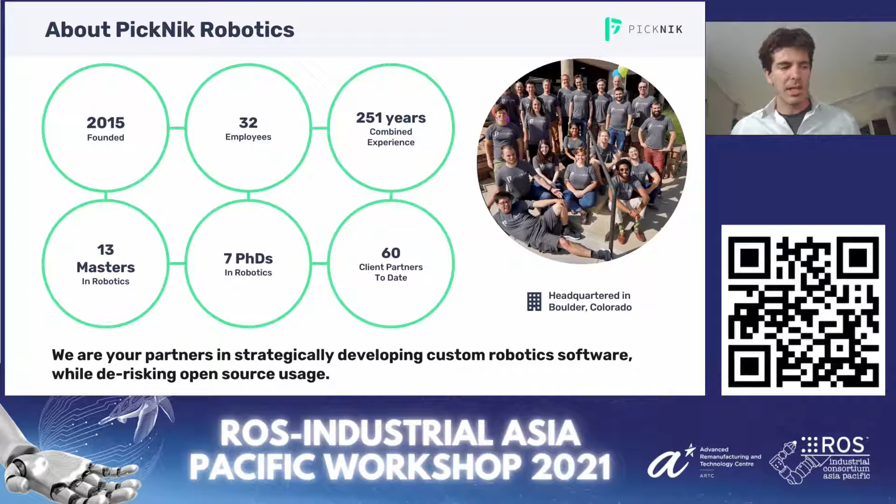And I would like to start out with I'm Dave Coleman, CEO of PickNik, and start with a big picture of where MoveIt's at. I guess before that, though, next slide, the agenda. Next slide. So PickNik Robotics, we're in Colorado in the United States, and we've been around for 6 years now. Team's growing quick, so just you see we have a very talented team of people who build custom robot software in the ROS ecosystem, and in particular MoveIt. Next slide, please.

And so our mission is to make this platform of software that can do all sorts of multi-purpose tasks. And we're really excited about what we've been able to accomplish so far. So the dream, of course, is this Rosie robot idea where it can do all these unstructured tasks. It can do industrial factory type tasks, of course, but also a lot of domestic tasks in your home, laundry, pancake making, dishwashing. So we're far off from this, but it has been done before in a very experimental approach at Willow Garage, and we hope to make that more mainstream in the future.

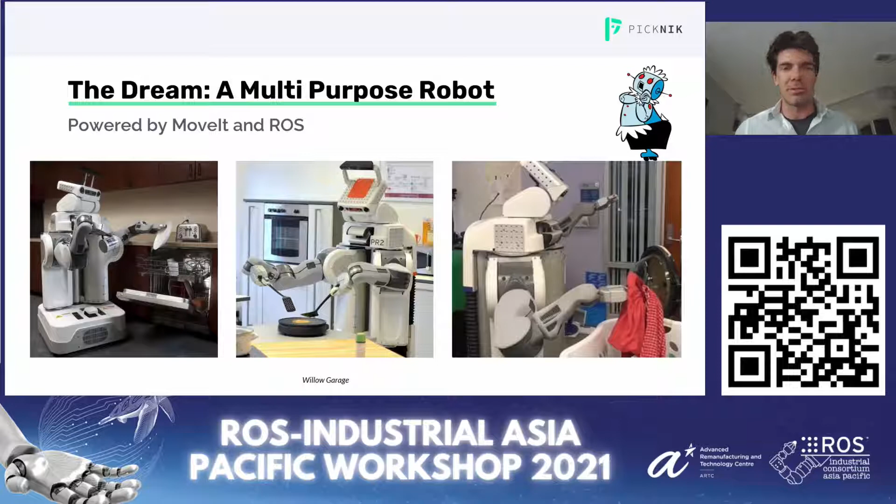Next slide. So MoveIt started in 2010 at Willow Garage, where same time ROS was developed. So it was developed as the manipulation package for the ROS ecosystem, and it's gone through a lot of iterations since then. Last year we announced MoveIt 2.0, which is simply MoveIt for ROS2, and whispers are on the street of what will MoveIt 3 be like, and what API changes, and what's the next big revolution in MoveIt 3.

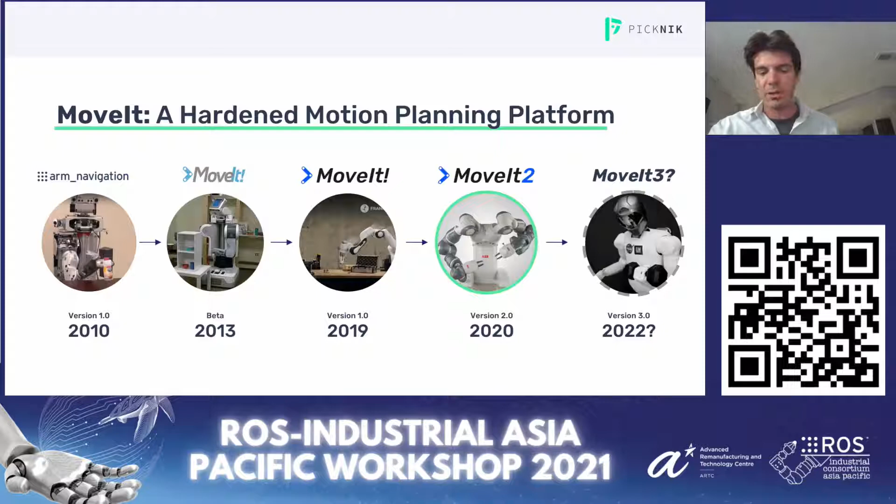And the difference between MoveIt 1 and MoveIt 2 is unlike what Matt Robinson was talking about with this at SwRI, their strategy of having the same library support ROS 1 and ROS 2, we took a different approach. Has lots of pluses and minuses. It's unclear which one's better, but we actually just did a straight port of everything in MoveIt 1 to MoveIt 2, and we're still syncing the two code repositories through Git, so code syncing, but they are in fact different versions. Next slide.

And the ecosystem of MoveIt keeps growing. There's a lot of different plugins to do different types of things. Some of them are more mainstream supported and more recommended, like FCL is maybe the more streamlined, fast collision checking library, but it gives you a lot of options and allows you to benchmark. So different types of applications have different needs, and so you can experiment through which ones are best for you, and the tutorials walk you through how to use each one of these. Next slide, please.

And just our latest update in numbers for this year, a lot of robots have been used with MoveIt. It's very robot agnostic, which we're very proud of. And these are some rough metrics to gauge the popularity of how many downloads we get and how much has been cited in the literature. A lot of researchers use MoveIt for their publications. And yeah, our GitHub users and code contributors has continued to grow. 262 people have contributed to this project over its lifespan.

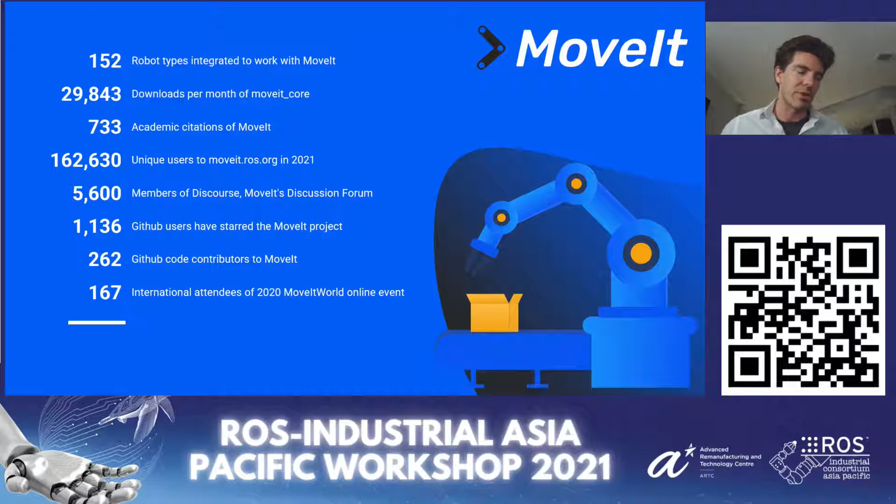Next slide, please. And a little more about our community. We'll be at ROSCon next month with a workshop about how to use MoveIt for mobile manipulation. Something we're really excited about is combining the navigation side with arms. And I've heard several talks this morning talk about that combination. It seems like a hot topic right now. World MoveIt Day, our annual hackathon, it'll probably be in the spring again. And finally, we have monthly meetings where we discuss as a ROS2 TSC working group issues with the MoveIt community. Next slide, please.

And so just a little high level of what we've been doing at PickNik and with some of our partners and collaborators and customers in deploying MoveIt in real-world applications. Next slide, please. So we're seeing it used in really places way beyond the factory. And I think this is really cool to see that the traditional constraints of a conveyor belt or an area that you can completely CAD and structured is kind of, we're able to advance beyond that now as software gets more powerful, as perception and grasping algorithms are being taken out into more of the quote real world.

So one of our biggest projects lately has been in agriculture and actually harvesting produce out of plants. And these are just really tricky because of the different lighting changes from being exposed to the sun, the challenges on the waterproofing, the hardware side, but also just plants are non-rigid, meaning that they move when you hit them and they're flexible, and so the planning problem there becomes a lot harder.

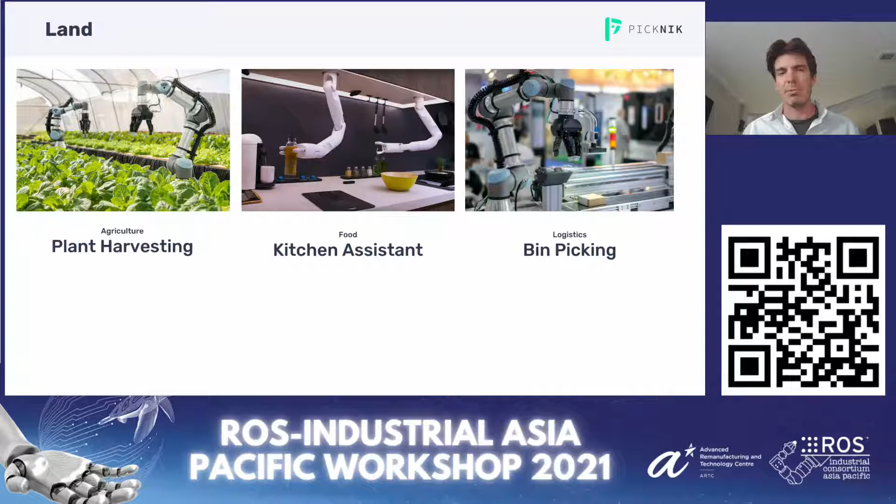Another area we've seen MoveIt used a lot in the past few years is in food production systems, particularly smart kitchens. This is a Samsung prototype platform that they demonstrated at CES in the middle picture here. But of course, lots of usages of MoveIt for bin picking and logistics, which maybe is the most applicable to the ROS-Industrial user base or viewership here. Next slide, please.

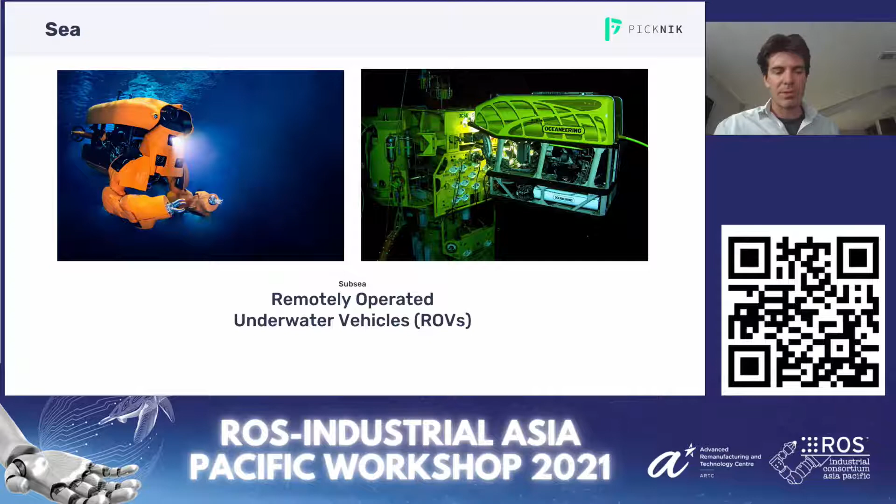So going beyond land, we've seen MoveIt used in a lot of underwater applications. So how do you control the robot arms to do useful things without a human operator nearby? There is a human in the loop at some point, giving it guidance, and you want to keep it as high level as possible because of latency and bandwidth issues of using communication over wireless water optics. And so MoveIt's been used in a lot of these different applications for ROVs. Next slide.

And finally, air, or I should have said space here. We've been using MoveIt a lot in different space applications. The Robonaut program uses MoveIt on the ISS, International Space Station, to assist astronauts, still a little bit experimental, of course, but the idea being that astronauts are very expensive to have in space and also dangerous. So using robotics as much as possible to augment the time that humans spend in space,

particularly in-orbit satellite servicing, being able to repair satellites that need upgrades or that have otherwise become garbage, being able to capture those and actually reattach things. A number of companies are investigating using MoveIt for those things. This is a new burgeoning field, but the space industry is definitely growing a lot.

And finally, there's a big push internationally, NASA, but many other space programs across the world, to colonize the moon. And a lot of what's being talked about is how do we actually send materials down and start the construction with robot arms before astronauts arrive, or during periods where astronauts are not present, because they'll be coming on and off the surface. Next slide, please.

And so this is a new thrust for PickNik, something that we're thinking about a lot lately: how do you not have a fully autonomous system, but actually be partly supervised, not teleoperation, but having an operator at a high level, giving it missions, objectives, and executing that semi-autonomously. And I think this is also applicable to factory floors.

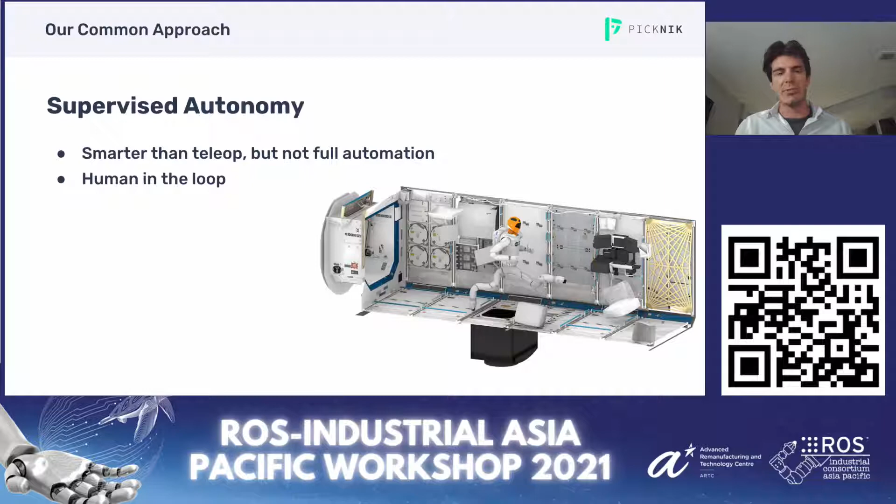So in this section, I just want to give more of an update on the MoveIt 2 roadmap, getting a lot more technical here, and the progress made on the MoveIt migration. Next slide. So here's a big number. We have a spreadsheet. We did the calculations. We estimate that we're 98.5% complete with the full migration.

The things blocking us are largely because there are things in ROS 2 that aren't quite perfectly tied up around the parameter server, which is no longer called a parameter server, but just the parameters, and launch files. So we're working with Open Robotics and other members of the technical steering committee of ROS 2 to fix those. As we just upgraded to Galactic and Rolling, a lot of those things are now actually out beyond Foxy. So we should be seeing the MoveIt Setup Assistant finally released as those get wrapped up.

And then a few of the more outer things like the Pilz Motion Planner and Python is something that we've deprioritized because we typically work in C++, but we know a lot of our users care a lot about the usability, ease of use of Python.

A few stats, there's been 340 PRs, and there's a pretty big difference between MoveIt 1 and MoveIt 2 at this point. And finally, we've doubled the number of GitHub stars for the MoveIt 2 repo. So we have separate repositories, and we're kind of measuring the popularity. Of course, we still have a lot of holdouts using MoveIt 1, but we're really starting to see that momentum of the migration because we can say, next slide, we have pretty good feature parity.

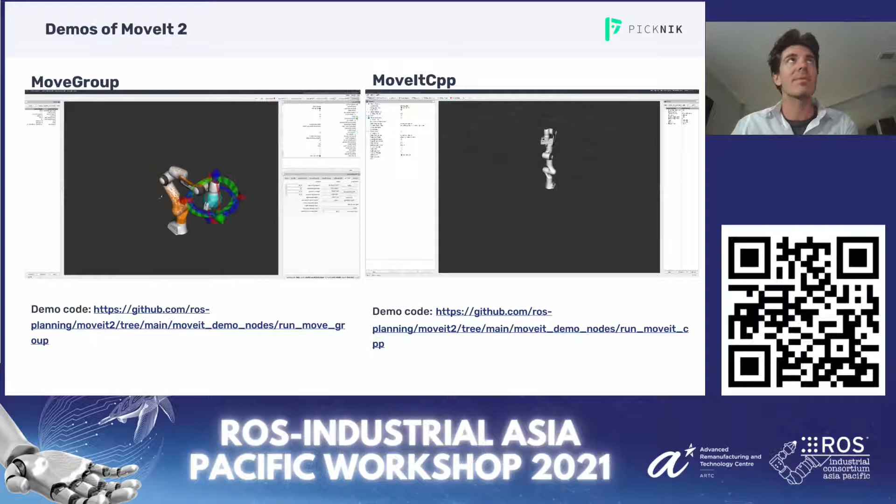And so in this section, I just want to talk about some of the new features in MoveIt 2. So it's not just a straight port, but we are trying to improve the real-time capabilities. In ROS1, they purposely did not focus on real-time, just as a design decision to make it a lot simpler for researchers and rapid iteration. But here we've been making visual servoing way faster, and the ability to react to human input and do dynamic scene updates.

Next slide. Another big thrust of MoveIt 2 has been the hybrid planning. And so we now can actually have two control loops running, similar to how the Navigation 2 stack works. One is a global planner, which is like RRT style, plans around obstacles. And at the lower level, we have an inverse kinematic space planner that has a much faster cycle time and control frequency. And I think this has been merged into MoveIt 2 at this point. This slide actually might be a little outdated. Next slide, please.

There's been a lot of work going into combining ROS2 controllers with MoveIt 2 so that we actually can run on hardware. And so I'll talk about that in a minute. But yeah, that's coming along. And finally, the next slide, the Pilz Industrial Motion Planner provides a lot more traditional approaches to robot motions, like point-to-point and linear and circular. And that's been merged into MoveIt 1, which is one of our first steps. And then we are working on porting it to MoveIt 2.

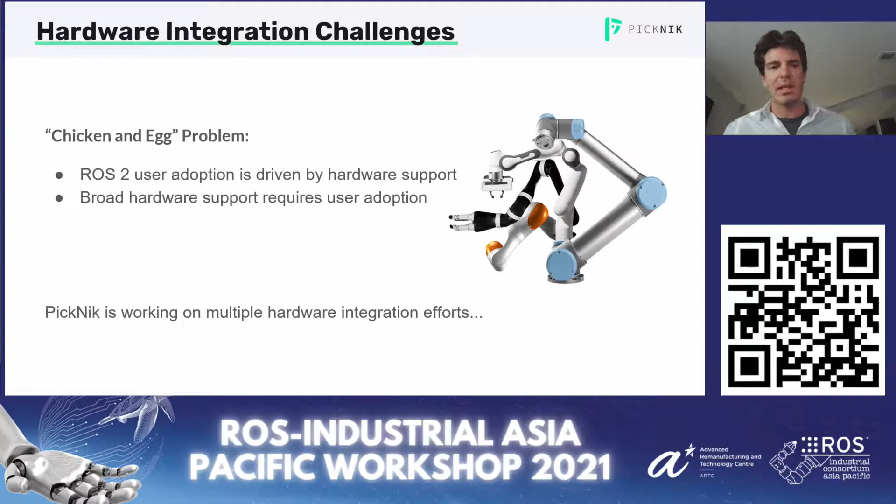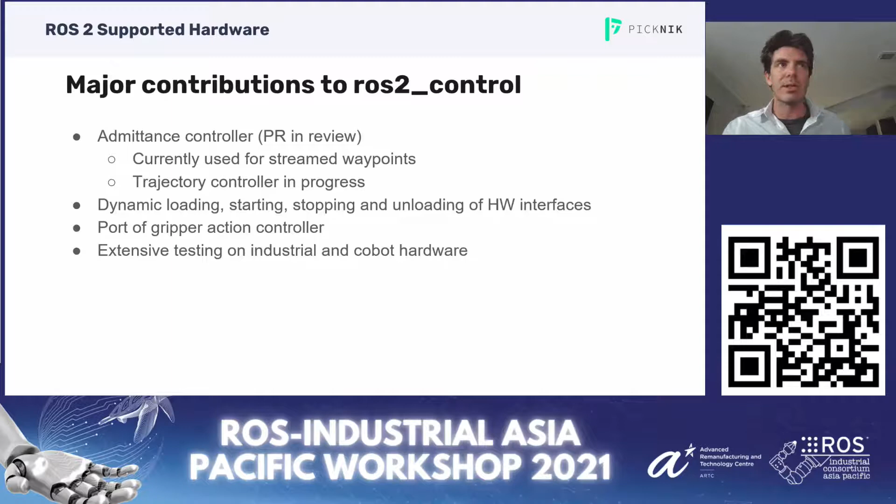next slide, ROS2 control we've gotten really involved in. For example, adding an admittance controller is something that a lot of our customers have asked for. It's so that you can interact with the world in a more soft way, basically. And so there's a pull request that's been open for a while on that that's about to be merged. We've extended the joint controller to support multiple interfaces, now having better abilities to load and stop hardware interfaces, supporting grippers, fake hardware. So it's a lot of progress on that side.

Next slide, please. In terms of the mobile manipulation side, we do have the Hello Robot working in ROS2 now. And part of that effort with them was to have MoveIt be able to plan for the diff drive itself. So if you want to reach over to something that your arm can't quite reach in a fixed space, it'll actually control the wheels to extend its working area.

Because of the computational limitations of fully modeling a 3D environment, it's not well suited for navigating over long distances like a full warehouse. You'd still want to switch to a Navigation 2 type planner. But if you are working in a local area, we can now synchronize the two in ROS2.

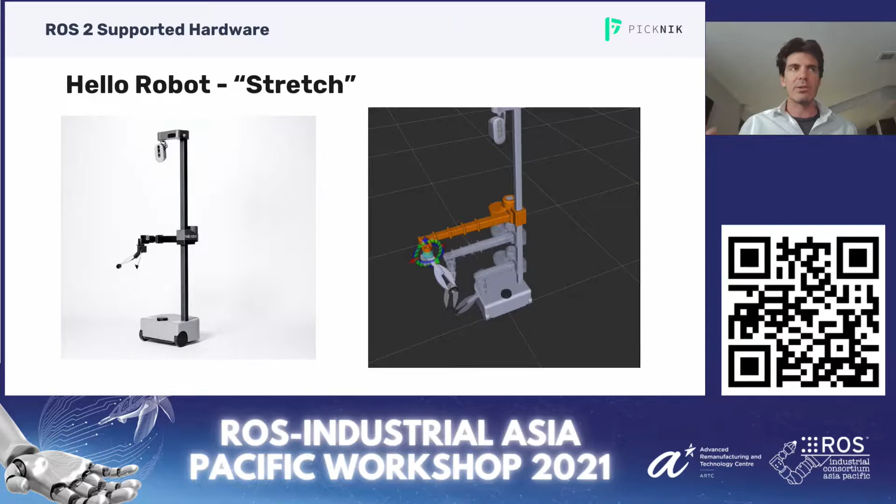Next slide. As Matt Robinson mentioned earlier, we worked together with the SwRI folks and Universal Robots to create drivers for the UR5 and 3 and 10 and whatever other ones they have now. And so we've had a beta release of that and another release that's a lot more polished and are using that every day. So I know this is a very popular robot arm and we're excited to just remind everyone that this is now available in ROS2.

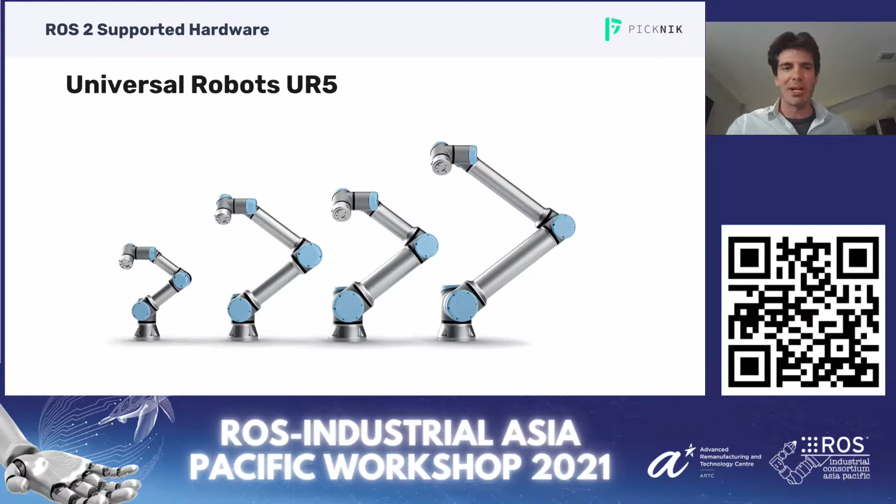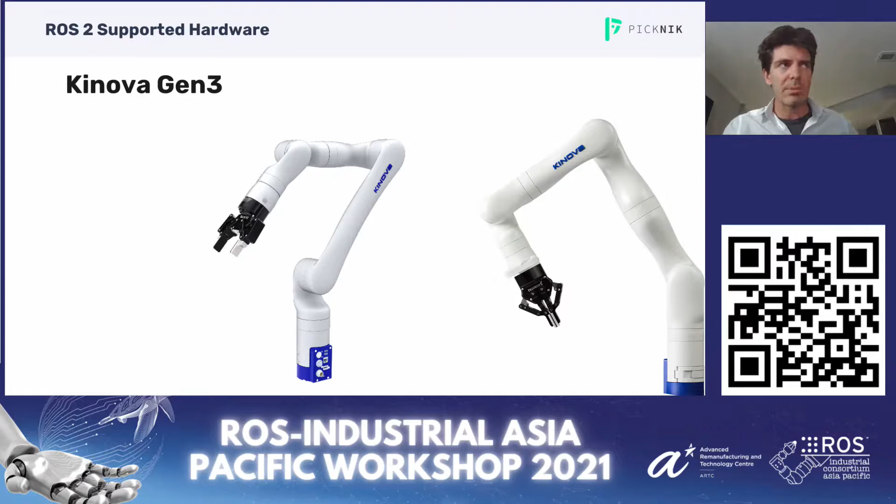So upgrade your systems. And finally, something we haven't announced before, next slide, is that we recently created Kinova drivers for the Gen 3 arms for ROS2. I don't think those are publicly available yet, but stay tuned for that. Those are in active development right now. And just going forward with MoveIt 2, next slide,

we're talking about what MoveIt 3 is going to be, and basically, next slide, we're doing a lot of work on being able to dynamically change end effectors at runtime. This is something that we've heard for years as a need, so if you want to change your tooling, it'll allow that. Component nodes, lifecycle management, and basically this will be a hard break from MoveIt 1. We won't be syncing with the ROS1 version anymore.

Next slide. On the MoveIt roadmap, you can see this on our website. There's a lot of features in the works with various levels of work in progress. Next slide. We've released successfully to Foxy Debians, and to Galactic, and most recently to Rolling. So we're now releasing Rolling quite frequently, and we really like having that because we don't have to build from source all the time, but actually have this actively developed one. And we had Windows support recently in collaboration with Microsoft.